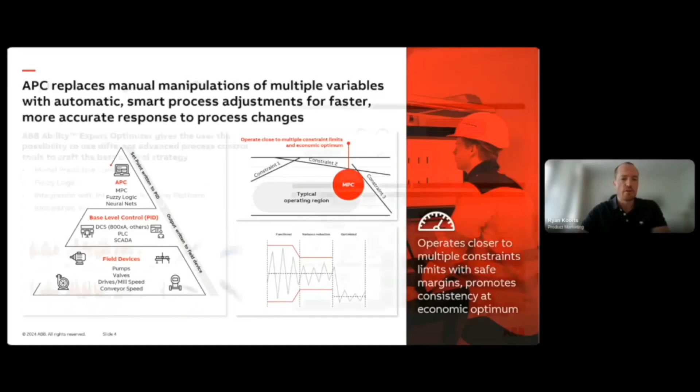When it comes to the different technologies for advanced process control, one of the most common ones would be model predictive control. So MPC is using dynamic models obtained empirically from process data and using the current state and historic states to predict the future of a particular variable, such as oxygen, pressure, grind size, etc., and then how far away that prediction is from target, and what control actions are required to reduce the delta between target and current value.

MPC is very good at tackling units with challenging dynamics, whether it's systems with large delays or high complexity of interactions with multiple inputs and outputs.

Fuzzy logic is a tool commonly used as well in industry, especially in mining. It's been around for a couple of decades now. It's more of a rule-based approach, more easier to understand from an operator perspective, but becomes a bit more challenging when it comes to tuning units with challenging dynamics.

And then you have the ability to introduce inferentials into your advanced process control setup, where inferentials are predicting and inferring states of the process in between updates. So these states are normally infrequently measured, such as particle size, if it's manually sampled, or density.

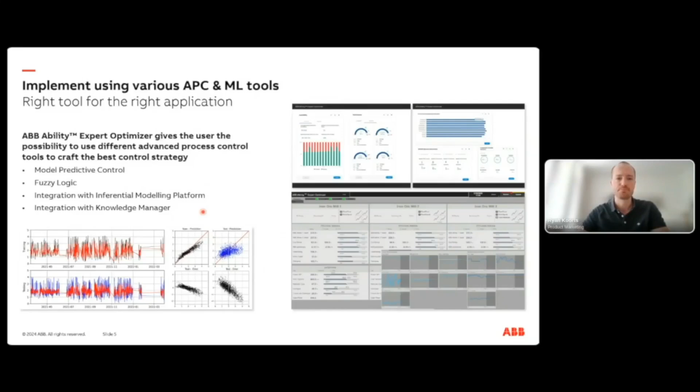So one of the challenges when it comes to optimizing minerals processing units, more specifically grinding optimization, would be the instrumentation element. So the ability to connect any new device, giving additional information on the process, is critical for progression towards autonomous mining optimization. The idea being that the more eyes we have on the circuit, the easier it will be to drive it to an optimum.

So with grinding, one example could be cascade monitoring, which helps to answer questions such as what's my current shoulder and toe angles within the mill? Am I operating at maximum grinding efficiency? And are my current states causing excess liner wear within the mill? So a solution that provides this information as additional variables can be used and included inside of an advanced process control application.

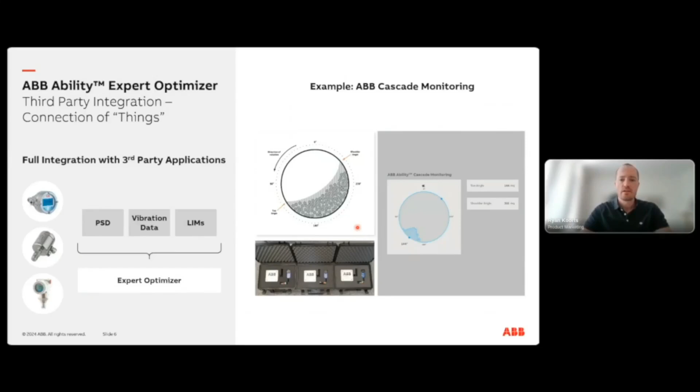When it comes to mining optimization, ABB has been leveraging advanced process control technologies to improve operations from the mine through to the port. Starting at the mine, ventilation on demand utilizes model predictive control to optimize airflows underground to reduce energy consumption, as these airflows are highly non-linear, interacting depending on the level underground, with slow and complex dynamics.

Moving to the concentrator, we have mineral applications such as grinding, looking to maximize throughput and minimize specific energy. Flotation looks to maximize recovery and minimize reagents. Then with thickeners and clarification, we look to stabilize the bed mass and underflow density, whether that underflow goes through to leaching or additional fine milling. The underflow density plays an important part - if it's varying significantly, downstream processes will perform suboptimally.

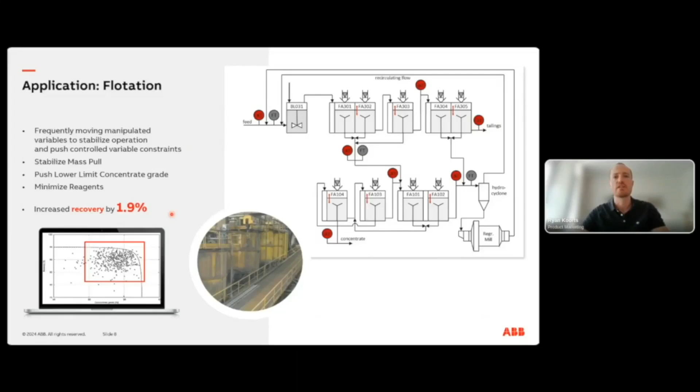By applying advanced process control to flotation, typical benefits are a 1 to 2% increase in recovery, while at the same time reducing the specific consumption of your xanthates, frothers, etc., by 10, 20, even 30% in some cases.

Another application would be clarification or thickeners. Thickeners have very slow dynamics, where MPC is very good at handling these types of challenges, as opposed to a human operator with a shorter time frame for attention or concentration. MPC can be applied here fairly well, utilizing handles such as flocculant dosing and the underflow drive of your pump, with goals of reducing overdosing of flocculant, maintaining stable underflow density to downstream units, and potentially reducing wear on the rake within the thickener.

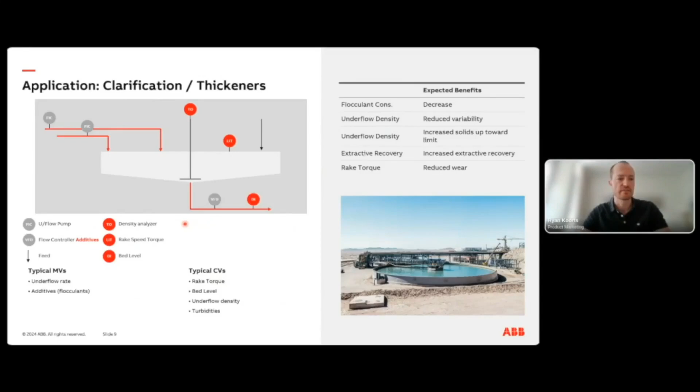Moving on, we are joined by Johannes Sikström from Boliden. Johannes is Head of Section Process Control and Analysis at Boliden System Technology, and was heavily involved with both the digital twin evaluation of advanced process control and the on-site implementation of the advanced process control projects. He will discuss both the projects and why they chose advanced process control for increasing grinding performance. This is pre-recorded, so he will jump right into it.

Thank you. I will talk today about a series of projects that we have done together with ABB regarding advanced process control. First, we investigated how we can motivate investment in these kinds of technologies, and then we also implemented it, but I will get into that.

The first step of this series of projects was really in proving the technology - proving that APC and advanced process control can bring value to Boliden's processes. This was done with simulations.

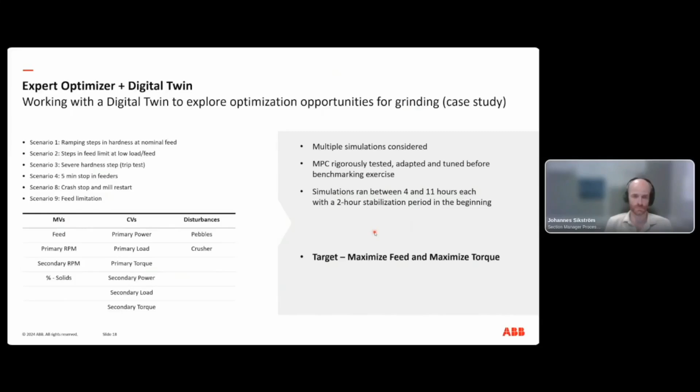This causes a lot of issues if you have the set points close together, because these will interfere with each other and start messing around with each other. Due to this, you need set points for these controllers with a difference between them, and this creates a gap where we can't really get the performance out of it.

With an APC, it knows about both the torque and the load and a lot of other stuff at the same time, and can balance them all to the optimum, instead of these interactions being a problem. So this is one of the main reasons we saw that, because our PID strategy is quite good performing already, but due to these limitations in the technology itself, we were not able to really get that last performance. That's one of the main reasons we were interested in going to advanced process control.

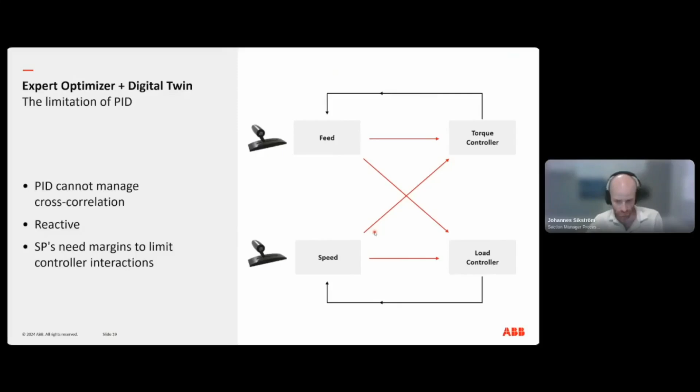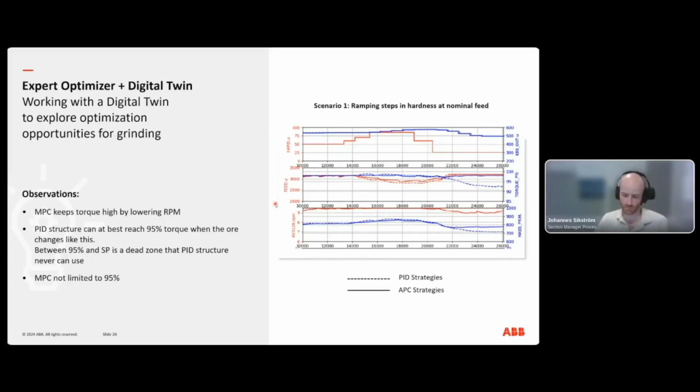What the APC does is lower the speed so it can maintain a high load through this period. You can see the solid blue here is the torque for the APC, which is kept really high even though we have a softer ore. This is exactly what we were after, and here we can see in the benchmark that it works like we hoped.

I'm not going to go through all of these scenarios, but you get the idea. There were some scenarios, like if we had a short stop of 5 to 10 minutes, where the APC was pretty similar to the PID - it wasn't better, but it wasn't worse. But these were the big ones where we saw it could really use more of the installed power.

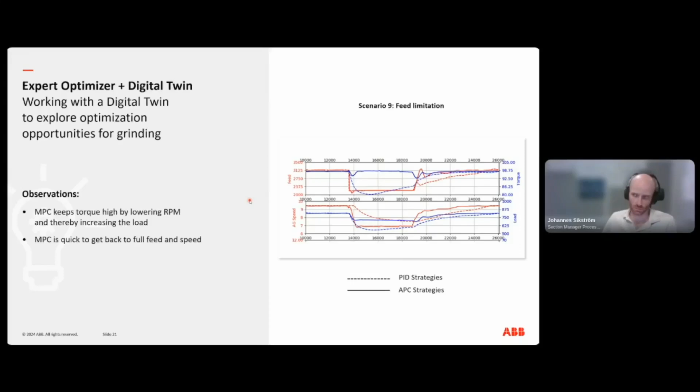And so in summary, we saw that it could handle the cross correlation of variables and better utilize the torque. We also saw that it had a bit higher throughput because it was a bit faster to get the throughput back up after it had been reduced.

And the last point here is quite important as well, because in a PID, you typically don't have any constraints management. The PID doesn't know about constraints, it only knows about the value, the set point, and how far it is between them. But since in an APC, you can be aware of the constraints and you can act really aggressively once you are close to an important constraint.

And through that, we saw that we could potentially have a higher set point in normal operation because the disturbance reaction was a bit stronger to act once it was really needed. So we were really happy with this.

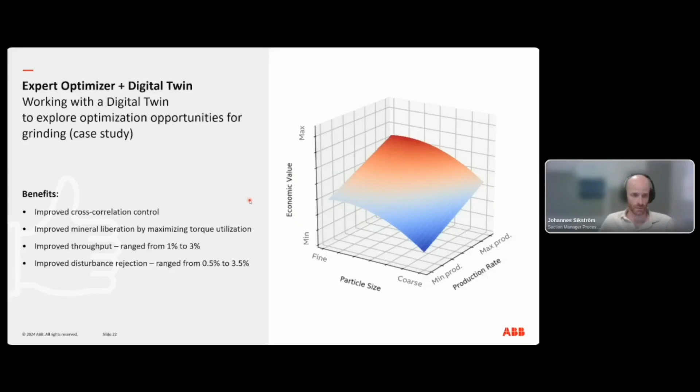We presented it to our sites, and Garpenberg, one of our sites in Sweden, in the south part of Sweden, was interested in moving forward with the implementation, which we then did.

And Garpenberg, there has been mining there for a really, really long time, from before 400 BC. So it's an old mining region, and it's a mixed ore, but the main value comes from zinc and silver. And they have a grinding circuit with two AG mills, one 5 megawatt primary mill and one 2.5 secondary mill.

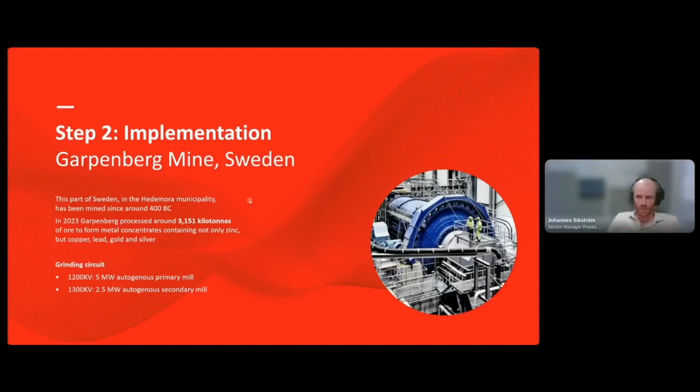Like I said before, the ultimate goal is to maximize the liberation, to have a good recovery. And we do that by having a high power utilization, but we want to achieve that utilization through a high feed or high throughput, of course. Stability downstream, so the stability in flotation, is also a very important part in this.

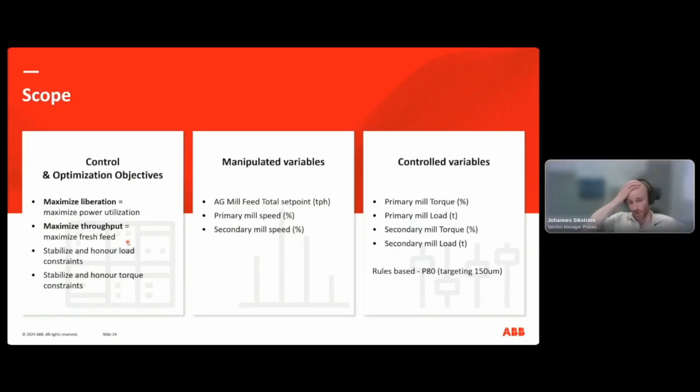And we know that MPC has this predictive capability to look ahead, and that can bring additional stability because it doesn't need to violently react, but it can predict and think ahead a bit, which is good.

And of course, constraints both on the torque, load, and some other constraints. What we're manipulating is the set point for the feed, and then the speed of both the primary and the secondary mill. We also have a pebble gate which feeds pebbles to the secondary mill, but that is currently operating at 100% almost all the time, so it's not really something we control that much.

But if the torque gets too high, the gate can be stopped or reduced. We actually left that to the normal PID controller, so that was not included in the APC because there really was no need.

But we were controlling the torque and the load of both mills, and we also have size distribution measurements for what is going to flotation that we are interested in keeping in a certain range due to the paste backfill production. They have some quality demands there that we have some rules that go in and give us a bit of help to maintain that range.

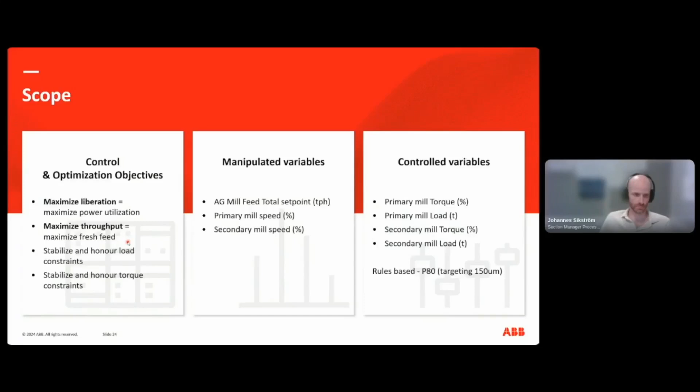So what did we end up building then? It became a bit of a hybrid in the end. It was very difficult to get everything into a single MPC control model. Particularly the speed was difficult to describe fully in a linear model.

So we have an MPC part covering the feed to torque relation, and then we have some fuzzy logic for the speed part. We also built a load target adaptation, we call it that, but it's basically something that continuously...

...calculates what the load target should be and adapts that over time. And that's really to get a good stable process. If the load target were to go all over the place, that could cause some disturbances. So we wanted it to be really stable and slowly going where it needs to go to not introduce any issues for flotation. But the load target adaptation has worked really well.

And of course, we have a lot of checks and controls on everything. So we have ready states for stuff that needs to be in the right mode for it to be able to run. We also had some watchdogs on the communication and stuff like that, so that in case the machine where the APC is run is down, then it would detect that and be kicked back to the regular controllers until the machine can be restarted, or if there is an issue or something like that.

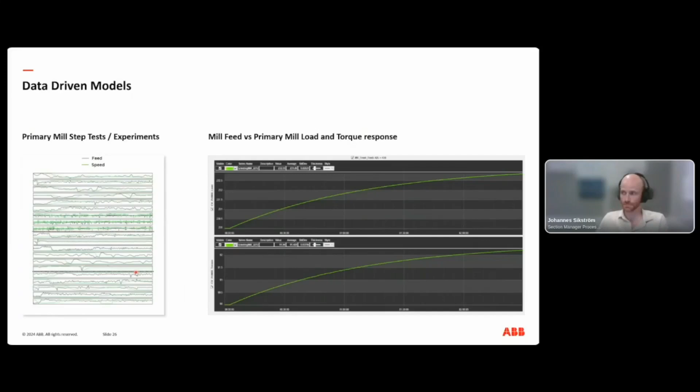Typically in Boliden, it's quite important to the operator to have most of their interactions inside of 800XA. So we don't like to have them in a lot of different interfaces, but rather try to pull stuff into the DCS.

Because they are curious, they want to understand how it works, how do we interact with it. And I think that was a bit of a success factor, that we were able to do a very small change in the way they work, but the change was more in the controller, which they don't really see.

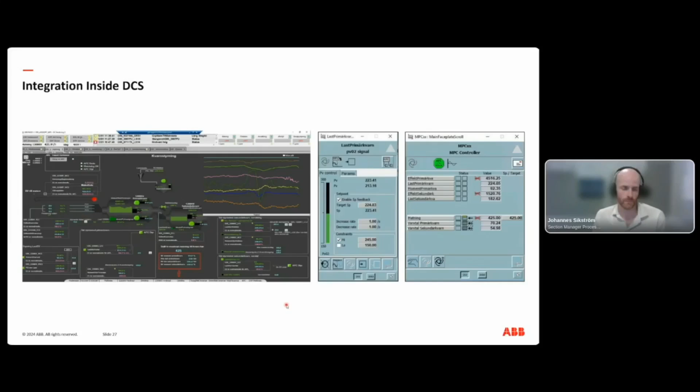So what were the benefits that we have been seeing for this? This has been running in production now for a year or so, I would say.

We have been seeing this better utilization of installed power that we talked about basically all the way through my presentation, because that's the main thing we wanted, and we have seen that. It can use the speed of the mill in the entire range of the process and production, so to say, to keep the load high even if there is a limited amount of ore for some reason. So we have seen a higher power utilization.

An additional thing that we didn't really have as a main goal in the beginning, but we have noticed later, is that we can have higher throughput for longer periods, also due to the ability to control the speed. So if the feed is maxed out against the limit for how much feed we can provide, then the old control would use the feed. If there was a peak in the torque, it would reduce the feed to get the torque down. But now the control can use the speed instead, and that way we can maintain that high feed for longer periods of time without needing to reduce it.

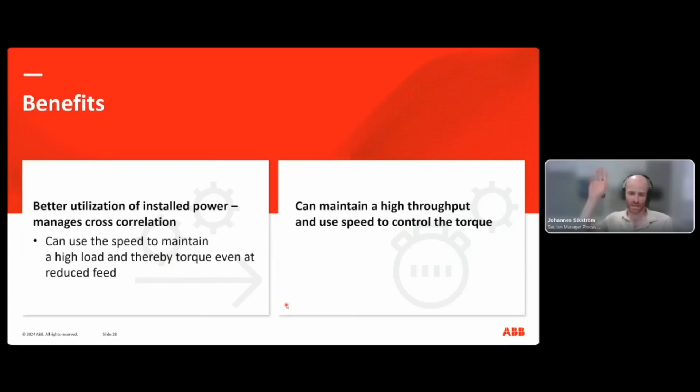Thank you, Johannes. Very much appreciated overview of those two projects. So in closing, advanced process control is a powerful tool for increasing processing performance on most major units on mining concentrators. It is a proven technology and is capable of handling multiple operating scenarios. And like most technologies, ongoing maintenance is critical, so having on-site champions or trained operators is critical for sustaining the benefits. And APC can significantly reduce operator workload for maintaining units close to operating constraints, allowing them to focus on other tasks.